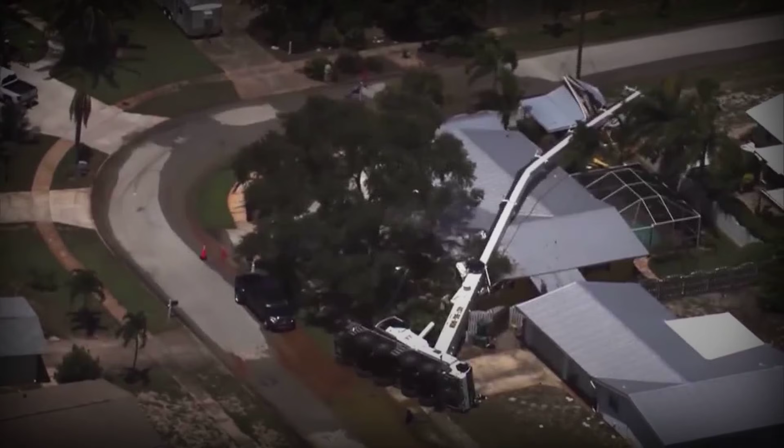August 13th, 2025. The Crane family spent decades in their Merritt Island home until a crane, meant to install an ordinary utility pole, collapsed without warning and crushed everything they owned.

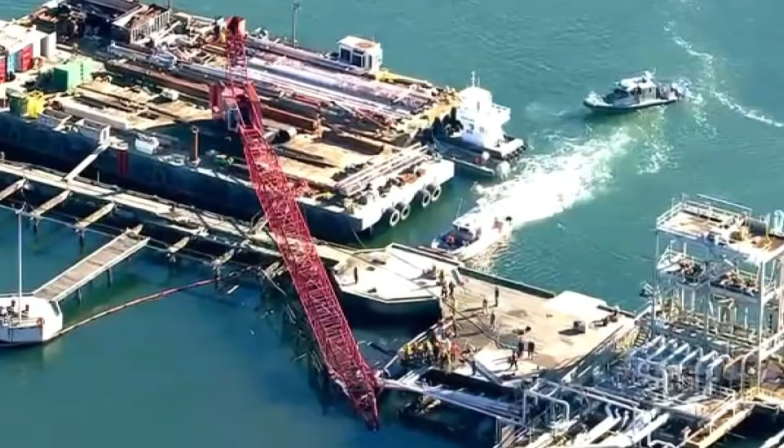The headline, "Crane versus Crane: When Your Last Name Becomes Your Nightmare," shocked the nation. Yet beneath the viral irony lies a pattern of reckless decisions, ignored warnings, and a deadly year for crane disasters across the United States. How could a single oversight destroy a family and expose an industry in crisis?

Jim Crane stood at the edge of his driveway, arms crossed, watching a crew from Big Iron International maneuver the Liebherr crane into position. The morning was already humid, the kind of Florida heat that makes everything feel heavier. He had lived on Mackerel Drive for over 40 years, long enough to know the ground here could be unpredictable, especially after summer rains. As the workers prepared to deploy the crane's massive outriggers, Jim's concern grew.

He stepped forward, voice steady but urgent. "I think this is a very bad idea," he told the operator, glancing at the spot where the outrigger would press down, just feet from his front walk. Doorbell camera footage later time-stamped the moment at just after 10:20 a.m. The crew barely looked up.

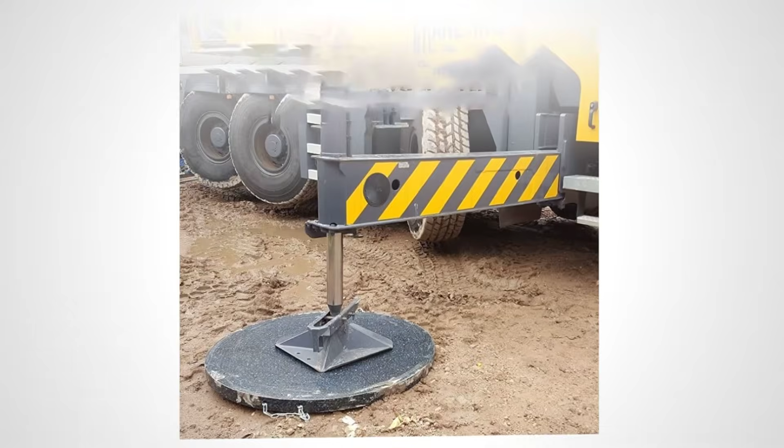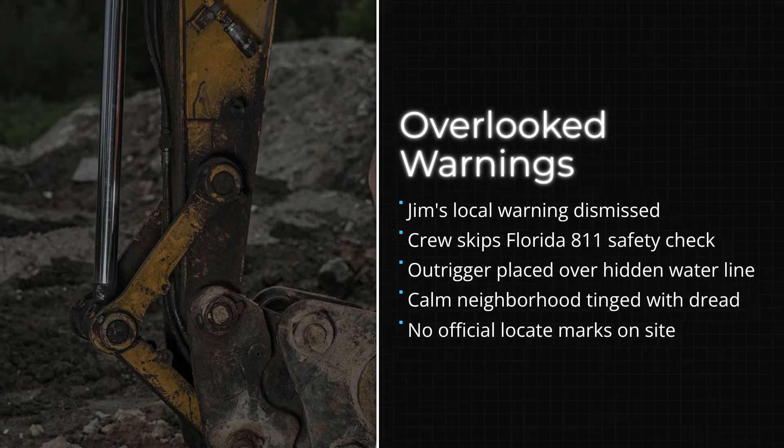One worker, in a high-visibility vest streaked with dust, shrugged off the warning. He assured Jim they'd done hundreds of jobs just like this, that the equipment and ground were more than up to the task. No one paused to check for utility markings or to ask if the ground had been surveyed. There was no sign of the orange spray paint that usually signals buried lines. No flags. No evidence that Florida's mandatory 811 call before you dig system had been followed.

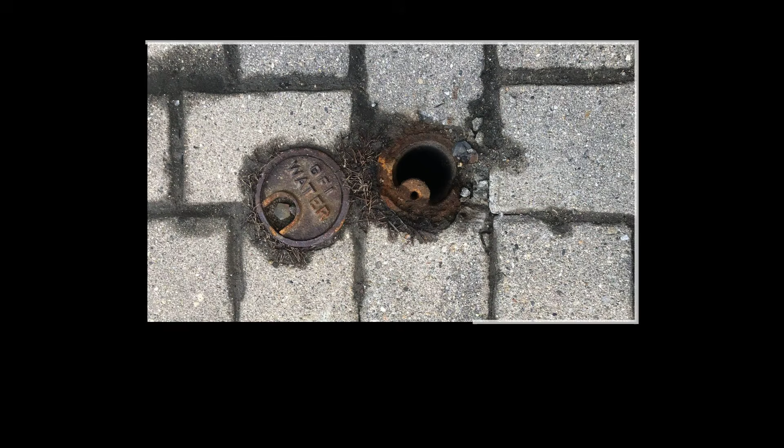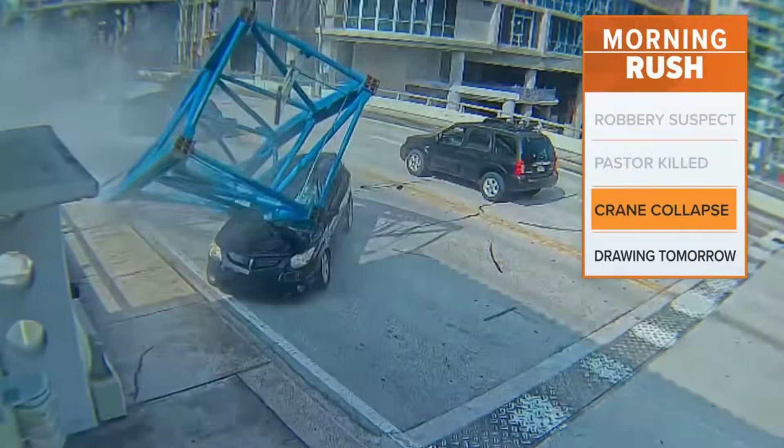The outrigger pad settled directly over a patch of grass that Jim knew sat above an old, unmarked water main, something he'd mentioned twice. As the crew set up, neighbors watched from behind their windows, some filming with their phones as the crane's boom began to rise. Jim lingered outside, uneasy. "I just kept thinking, this isn't right," he later told a local reporter. "But they wouldn't listen." The confidence of the crew stood in sharp contrast to the anxiety on Jim's face, captured in passing by a neighbor's camera as he paced the sidewalk.

In that moment, the difference between professional assurance and lived experience was measured in a few feet of ground and a single ignored warning. The tension built quietly, the outcome still hidden beneath the surface as the crane's engine rumbled and the day pressed on.

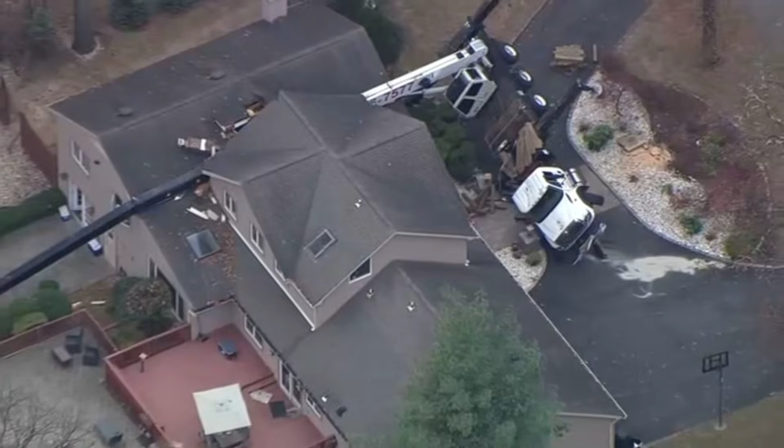A helicopter circled above Mackerel Drive as sirens echoed in the distance. The white and blue boom of the Liebherr crane pierced straight through the roof of the Crane family home, splitting the structure from the kitchen to the back porch. Debris fanned out across the yard. Furniture and beams tangled under the weight of tens of thousands of pounds of steel. From above, the devastation was unmistakable. A single machine had erased decades of family history in seconds.

Neighbors gathered on the sidewalk, some still clutching their phones, stunned by the violence of what they had just witnessed. One described hearing a thunderous crash that rattled windows up and down the block. Another, voice shaking, told a reporter, "It sounded like the world was ending."

Amanda Crane's car was missing from the driveway. She had left early that morning to take their rescue dog to the veterinarian. That small change in routine meant she was miles away when the collapse struck. Later, she would tell Fox 35, "She saved my life, and I saved her. These are just things, but I'm grateful we're alive."

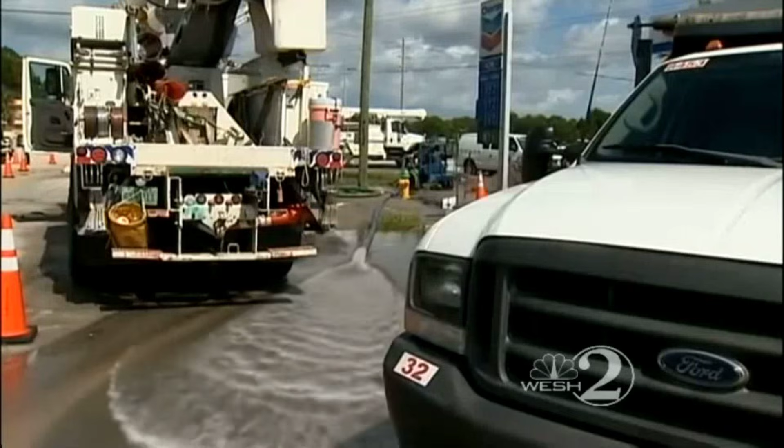Jim stood outside, untouched but shaken, watching as water from the broken main continued to flood the property. The sound of rushing water mixed with the beeping of emergency vehicles as first responders arrived. Firefighters and police moved quickly to secure the area, checking for gas leaks and searching the ruins to confirm no one was trapped inside. The living room, the kitchen, and the back bedrooms were all reduced to splintered wood and twisted metal.

In the hours that followed, news crews from Fox 35 Orlando and WESH set up along the curb, broadcasting live shots of the wreckage. The story spread quickly. Total property loss, no injuries, and the bitter irony of a family named Crane losing everything to a crane. For Jim and Amanda, survival was a matter of luck and timing. For their neighbors, the sight of the crushed home served as a reminder that disaster can arrive without warning, even in the most familiar place.

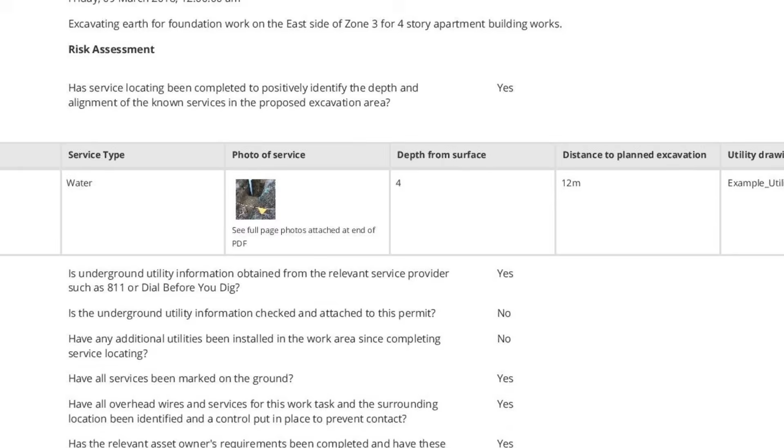Big Iron International's crew arrived on Mackerel Drive with a clear mandate: install a new utility pole for AT&T. The job should have started with paperwork. Florida law requires contractors to call 811 at least 2 business days before any ground disturbance. This step triggers utility companies to mark buried lines and pipes, a safeguard meant to prevent exactly the kind of disaster that would unfold. But no such notification was made.

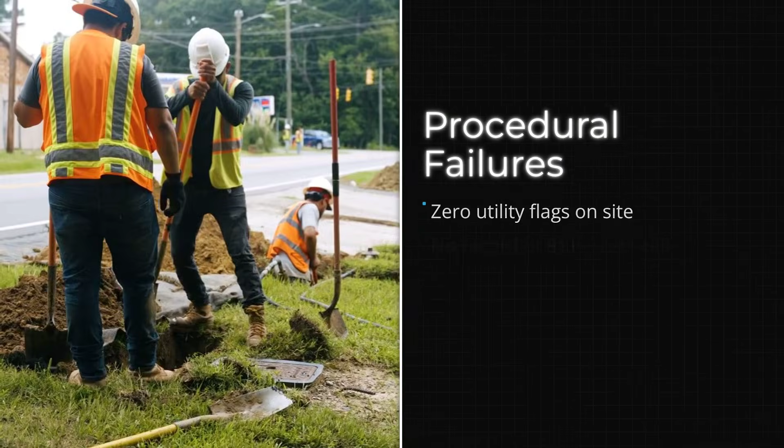There were no utility flags, no records of a completed 811 call, and no evidence of ground-penetrating radar having been used to scan for subsurface hazards. Florida's Underground Facility Damage Prevention and Safety Act leaves little room for interpretation.

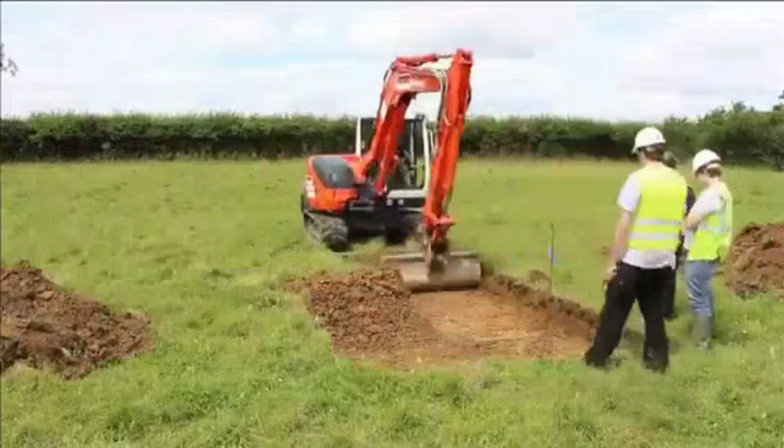The statute covers any operation that disturbs the ground, including the temporary placement of crane outriggers. A 2024 legislative update made it explicit. Failing to notify 811 and verify markings before deploying heavy equipment is not just unsafe. It's a direct violation, now carrying fines of up to $2,500 per incident and up to $10,000 for repeated or

willful breaches. The official Florida 811 Handbook for Excavators, revised in 2025, reminds contractors that outriggers, even if temporary, can exert ground pressure sufficient to breach utilities and are treated as excavation under current law.

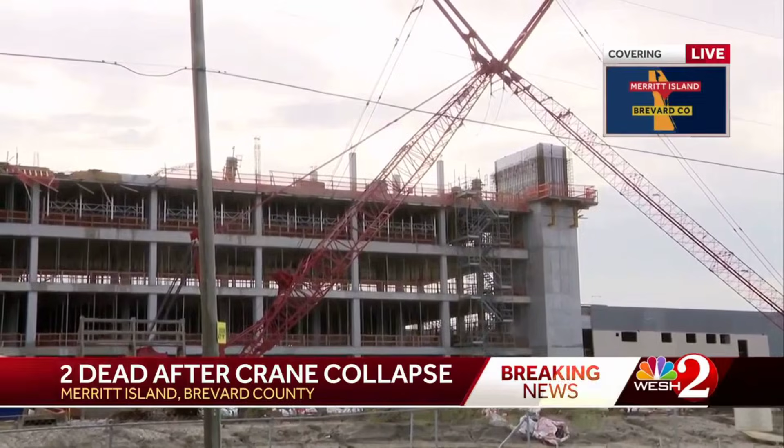Despite these requirements, the crew from Big Iron International acted on routine, not regulation. There was no written confirmation of utility clearance, no documentation of pre-job safety checks, and no permit on file for ground disturbance. The absence of these records would later draw sharp attention from investigators, but on the morning of August 13th, the crew pressed forward.

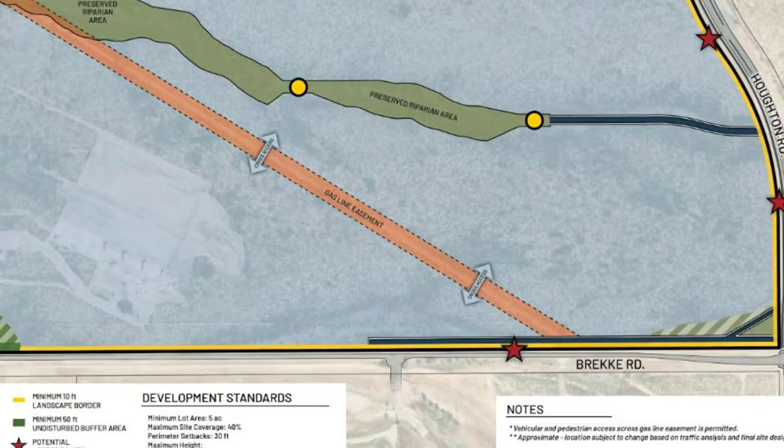AT&T, as the contracting entity, had delegated the work, but did not require a pre-lift safety audit or verification of utility marking as part of their subcontractor oversight. This gap in the contract chain allowed the crew to bypass essential safeguards without challenge or delay. The decision to skip procedural steps set off a chain reaction that could not be reversed.

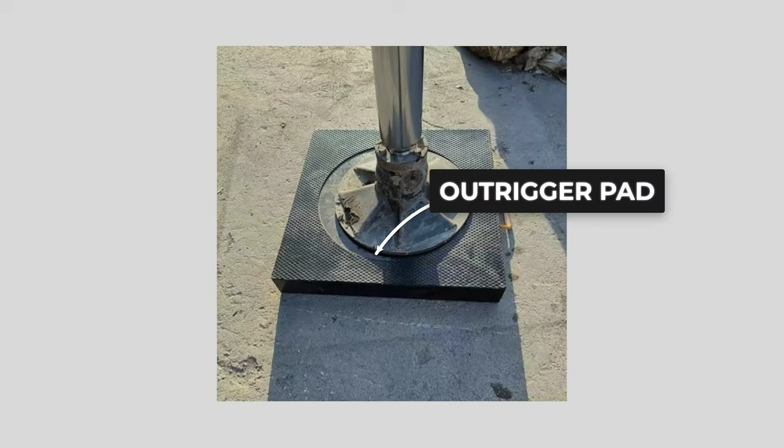With no utility markings and no ground survey, the outrigger was sited directly above an unmarked water main. The crew's reliance on experience, rather than compliance, left them blind to the danger beneath their equipment. The paperwork that should have protected the homeowners and the crew itself never existed. The legal and procedural safeguards were not just overlooked, they were absent from the start, leaving the site exposed to the hidden risks below.

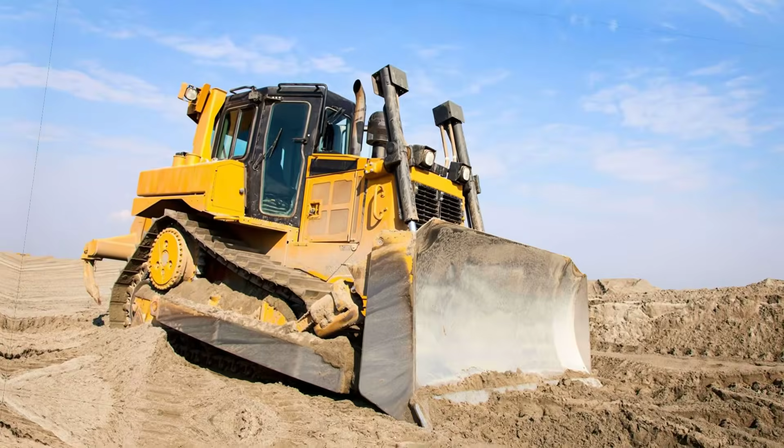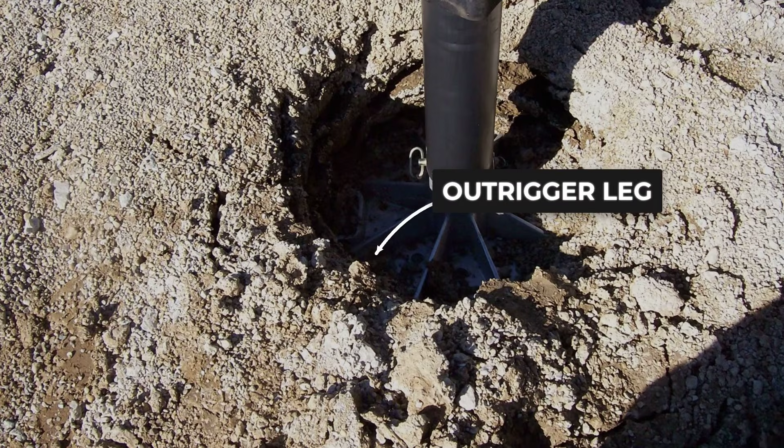A crane's stability depends on the invisible partnership between steel and soil. Outriggers, those heavy legs that spread from the crane's base, are designed to transfer tens of thousands of pounds onto the ground below. On a typical lift, each outrigger pad on a large Liebherr all-terrain crane can press down with as much as 80 tons, more than the weight of a diesel locomotive, focused onto a patch of earth not much bigger than a kitchen table.

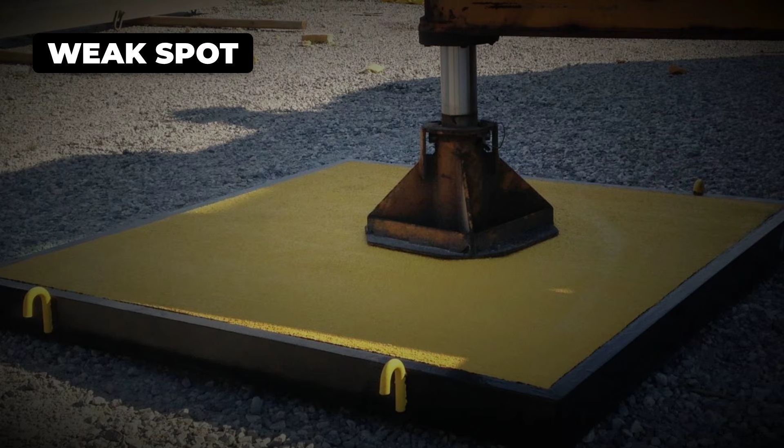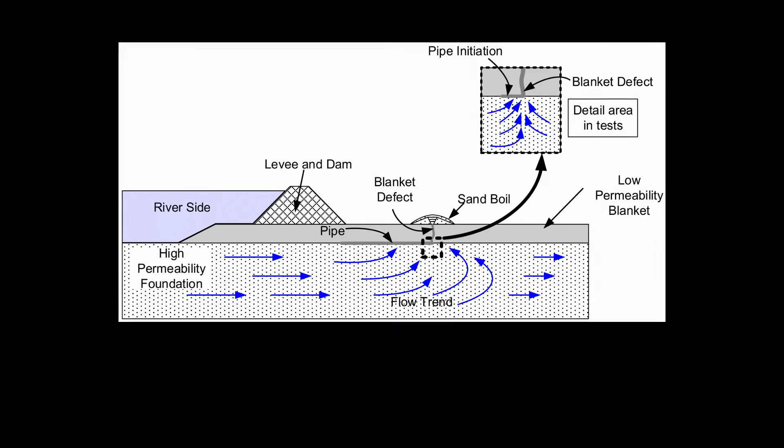That force only holds if the soil beneath remains solid and dry. When a pressurized water main ruptures, the physics change in an instant. Water surges out, carrying fine sand and soil particles away at high speed. This process, called internal erosion or soil piping, undermines the ground's structure from below, hollowing out support that once seemed firm. Florida's sandy soils, already loose and saturated from summer rains, are especially vulnerable.

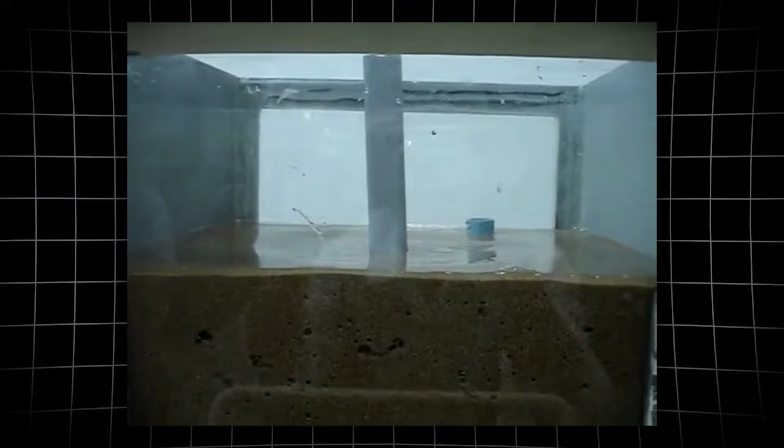A 6-inch water main at city pressure, often 80 pounds per square inch or more, can release over 1,000 gallons a minute, enough to wash out the supporting earth in less than 5 minutes. Civil engineering studies confirm that soil-bearing strength can drop by 90% in moments, turning what was once solid ground into something that acts more like quicksand. As the water jets upward, the outrigger pad loses its footing.

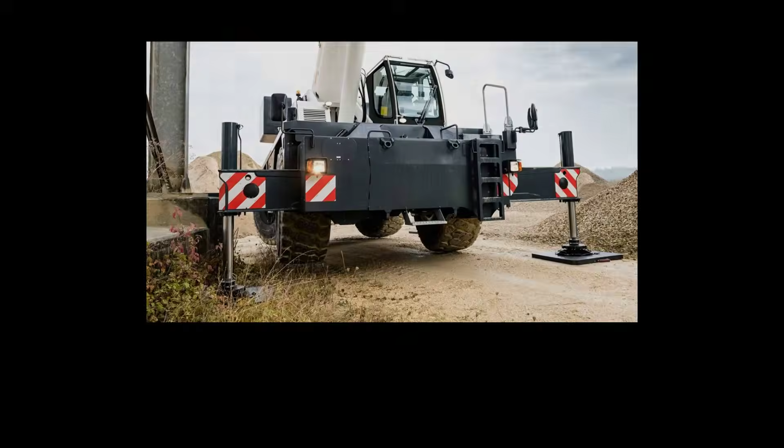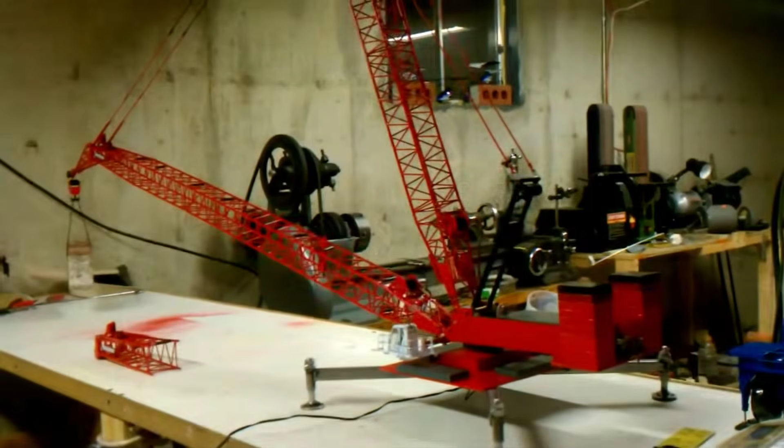The load that was safely distributed across 4 points suddenly shifts, concentrating weight on the remaining supports. But with one corner gone soft, the crane's center of gravity moves outside its safe zone. The entire machine becomes a teeter-totter with nothing to balance against. The physics are unforgiving. Even a slight tilt is enough to send the boom arcing downward. In documented cases, collapse can follow less than 90 seconds after the first signs of washout.

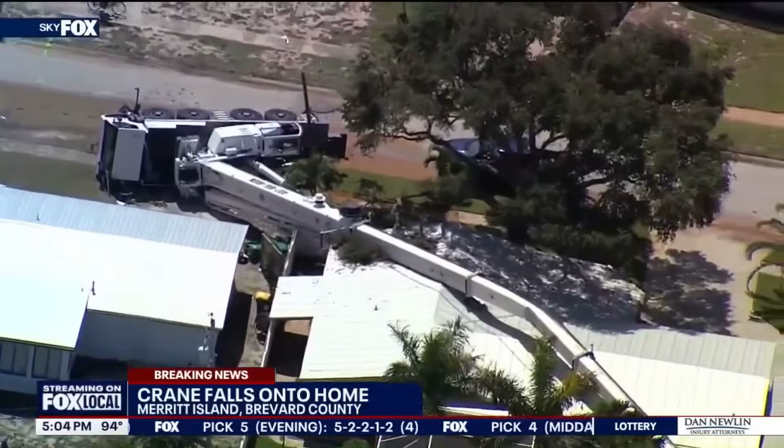OSHA diagrams and news footage from Merritt Island show the sequence clearly. The soil vanishes beneath the outrigger. The crane's base tilts, and the boom pivots inexorably toward the house. There is no time to react or redistribute the load. The collapse is not a slow-motion failure, but a sudden, catastrophic loss of support.

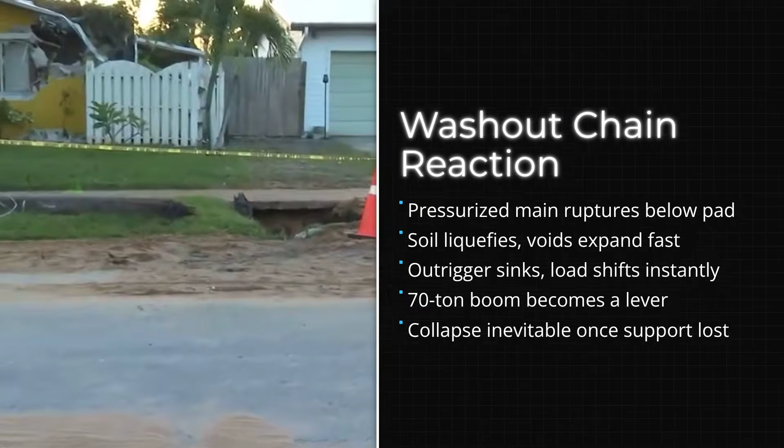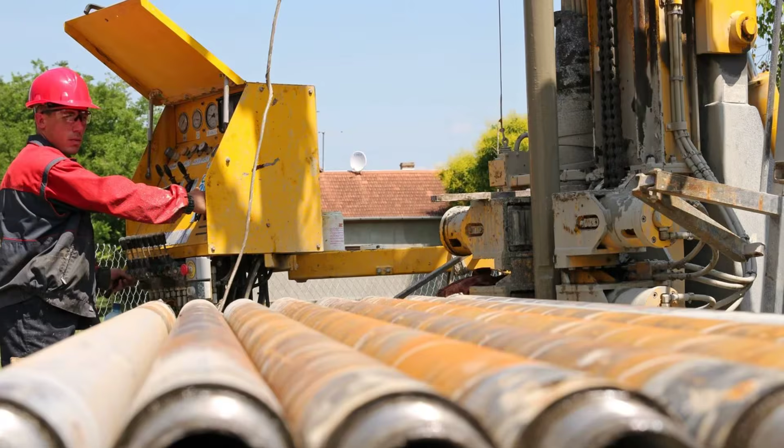A chain reaction set off by water, gravity, and the absence of a simple precaution. In the end, the forces at work are invisible until the moment they become undeniable, leaving behind a trail of destruction that could have been prevented by understanding what lay below the surface.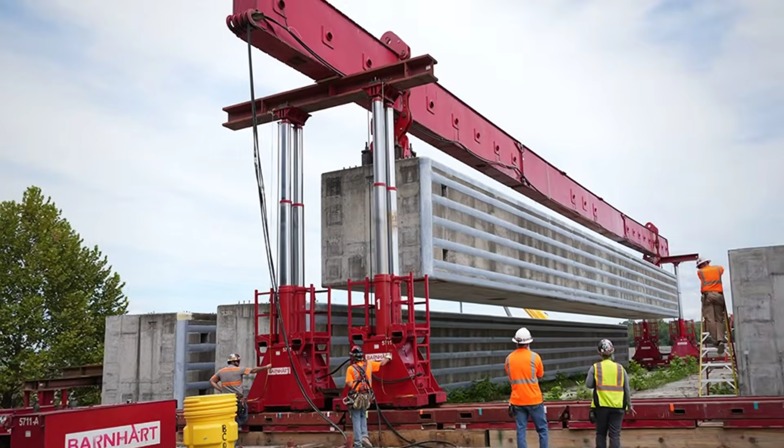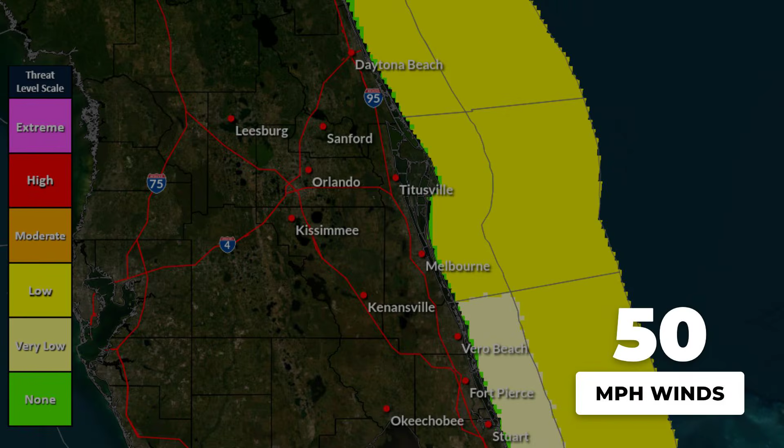On June 3, 2025, the construction site at Cape Canaveral Hospital was bustling with activity as crews worked to expand the facility. The project, valued at $410 million and led by Gilbane Building Company, had brought in a crawler crane operated by Sentry Crane and Rigging LLC to handle heavy concrete pours. That morning, the National Weather Service had issued a warning. Winds along the Brevard County coast were expected to reach 50 miles per hour. Despite the advisory, work pressed on.

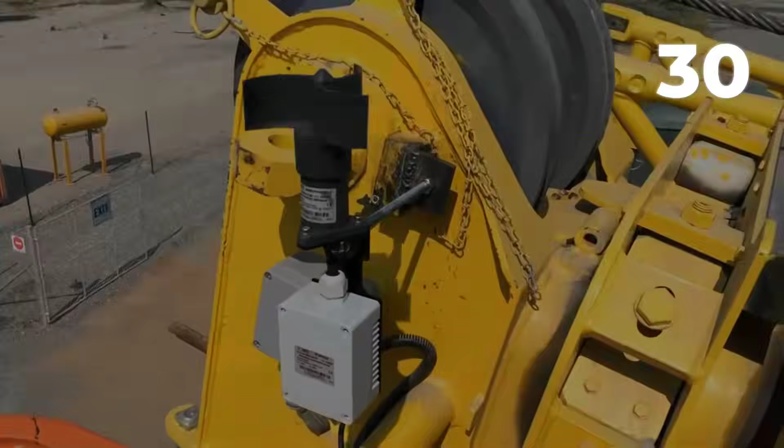By midday, sustained winds were clocked at nearly 30 miles per hour, with gusts well above the safe limit for crane operation. Witnesses later described the crane's boom swaying as workers hurried to complete the lift. Then, without warning, the boom collapsed, crashing down onto the site. 2 workers lost their lives in the chaos that followed. Their names were withheld from news reports at the request of their families, but memorials and union statements spoke to the loss felt across the community.

The collapse was not simply a matter of bad luck or unpredictable weather. Local news investigations revealed that Brevard County, responsible for overseeing construction safety, had only 2 certified crane inspectors on staff in June 2025.

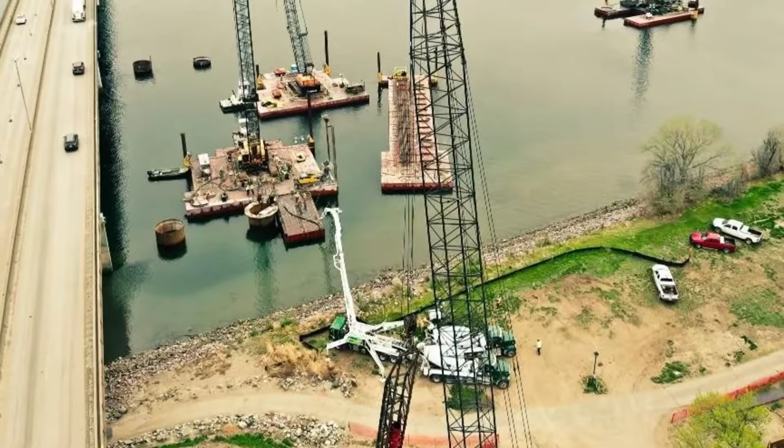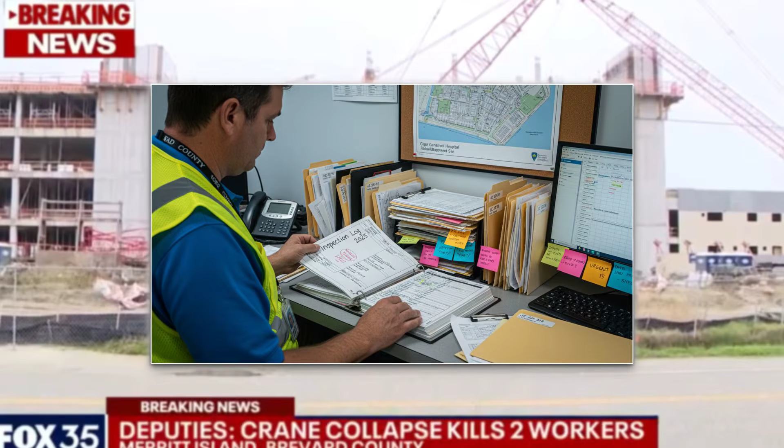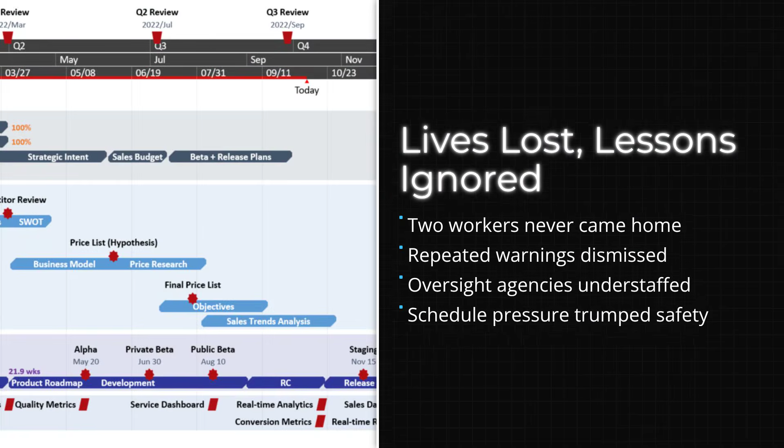With hundreds of active sites spread across the county, each inspector was stretched thin, sometimes responsible for more than 60 projects at once. County records confirmed that neither inspector had visited the Cape Canaveral site in the 2 days before the tragedy. In the aftermath, FOX 35 and other outlets questioned whether the drive to keep projects on schedule had eclipsed basic safety. OSHA's preliminary findings pointed to a failure to suspend crane operations despite official wind advisories.

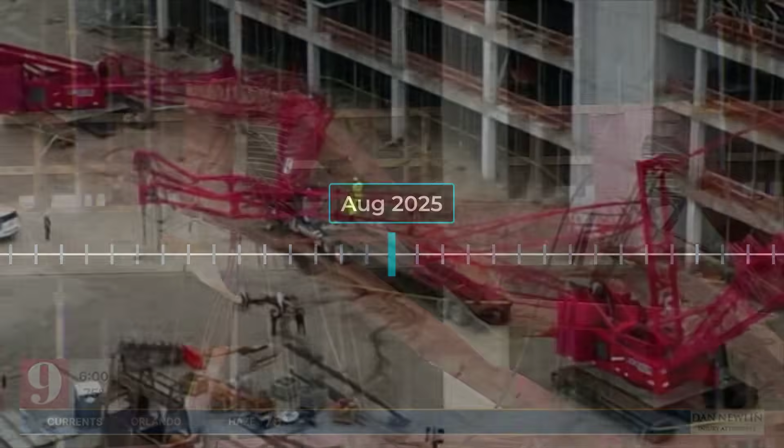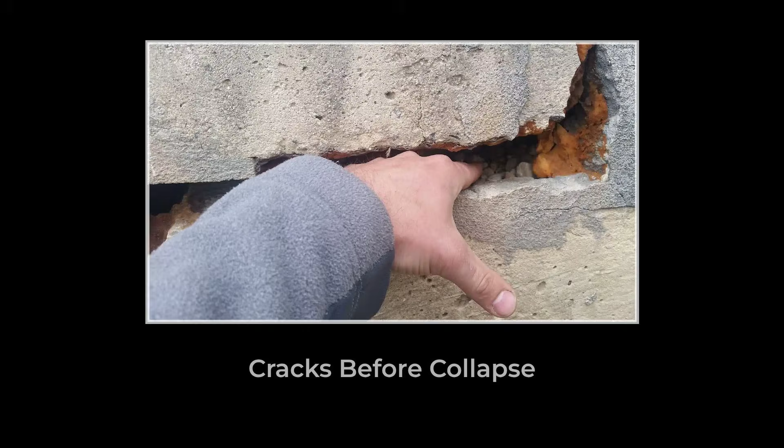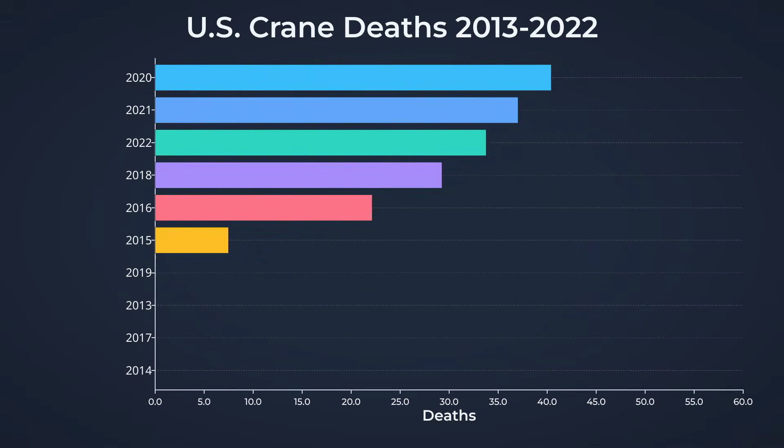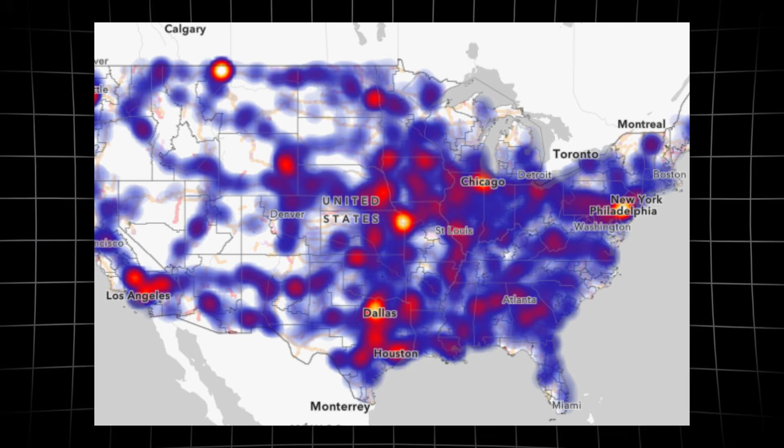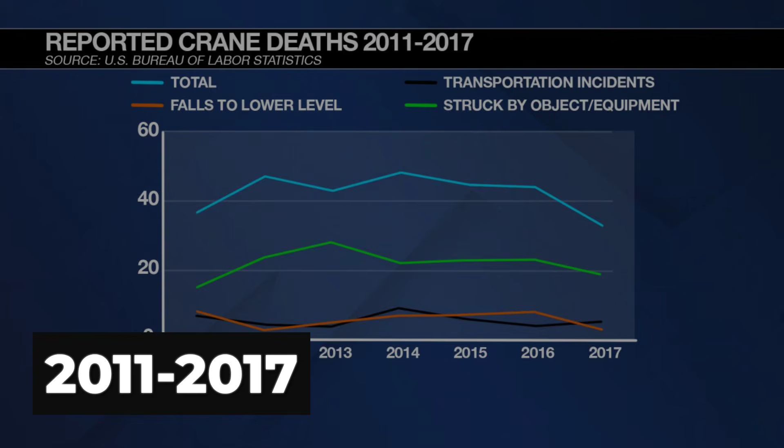From 2011 through 2017, there were 297 fatalities nationwide, a figure that does not include the mounting toll of the past 2 years. Industry analysis of 249 significant crane accidents links these events to 838 separate OSHA violations, resulting in 133 injuries and 133 deaths. Florida stands out as a national hotspot. Between 2011 and 2017, the state recorded 27 crane-related deaths, second only to Texas, which reported 42.

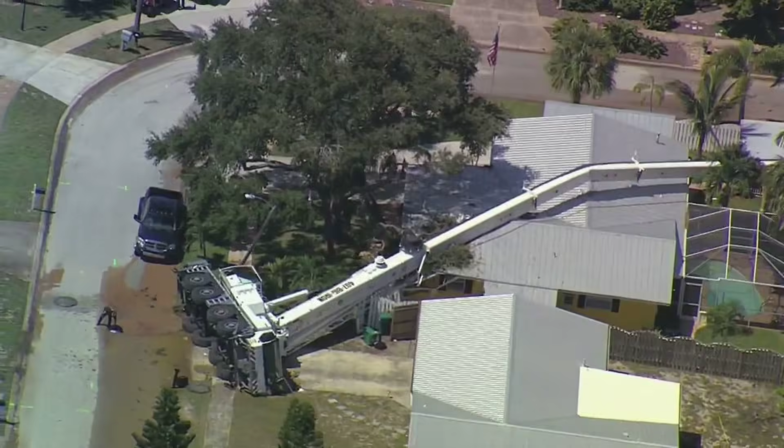In 2025 alone, Florida has been at the center of 2 of the year's most widely reported collapses: the Merritt Island residential disaster and the Cape Canaveral Hospital tragedy. The pattern is not unique to one region. In April 2024, a crane fell onto vehicles in Tampa, killing 1 and injuring 3. That same spring, 2 photojournalists died in Mexico City when an uninspected crane collapsed during a music festival.

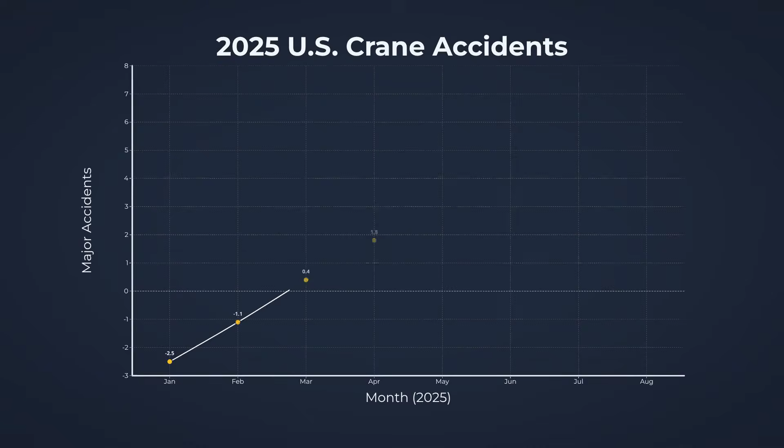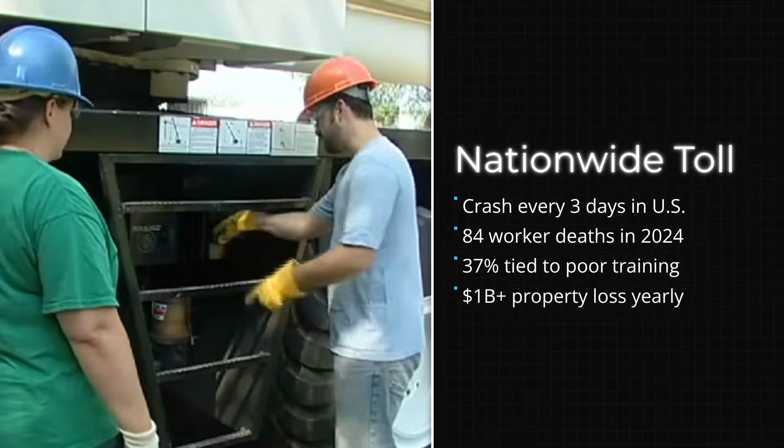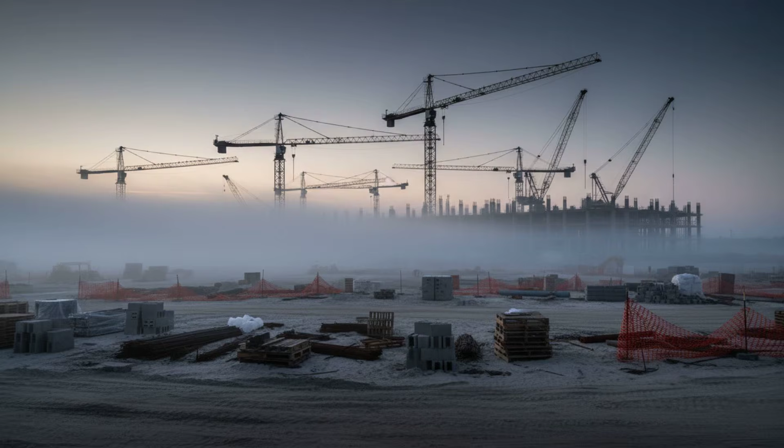The construction industry has seen nearly 2 major crane accidents per month in 2025, a pace that safety experts call unprecedented. OSHA's preliminary findings and emergency hearings have drawn attention to a common thread: failures in site assessment, inadequate crew training, and overlooked regulatory steps. Each number in these reports represents a workplace changed forever, a family left to pick up the pieces. As the year draws on, the statistics are no longer abstract. They are evidence of a crisis that demands urgent attention, not just from regulators and contractors, but from every community where cranes rise above the skyline.

A home can be rebuilt, but peace of mind is harder to restore. For Jim and Amanda Crane, months have passed in temporary housing, while insurance companies debate who is responsible for more than $400,000 in damages. Their story is a warning, but it is also a guide for others, especially seniors, about how to protect themselves before the first piece of heavy equipment arrives on their street. The American Society of Civil Engineers now recommends that every residential crane operation require a ground-penetrating radar survey. This is not just for large construction sites. It includes utility work and even small residential lifts.

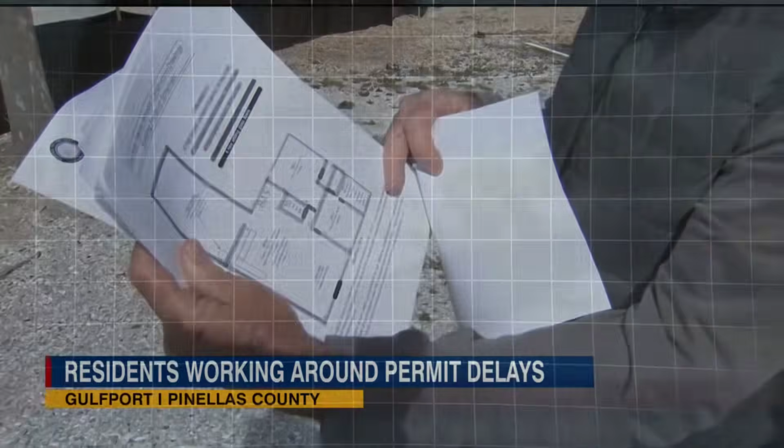If you see a crane or heavy equipment near your home, ask to see written proof of a recent 811 call and a GPR scan. These are your rights under Florida law. The Florida 811 system can be reached by dialing 811 or visiting florida811.com. If a contractor cannot provide documentation, you have the right to contact local permitting offices or code enforcement. For Brevard County, the main number is 321-633-2072. Document everything. Take photos of equipment, workers, and any visible markings or lack thereof. Ask for the contractor's insurance information and keep a record of every conversation.

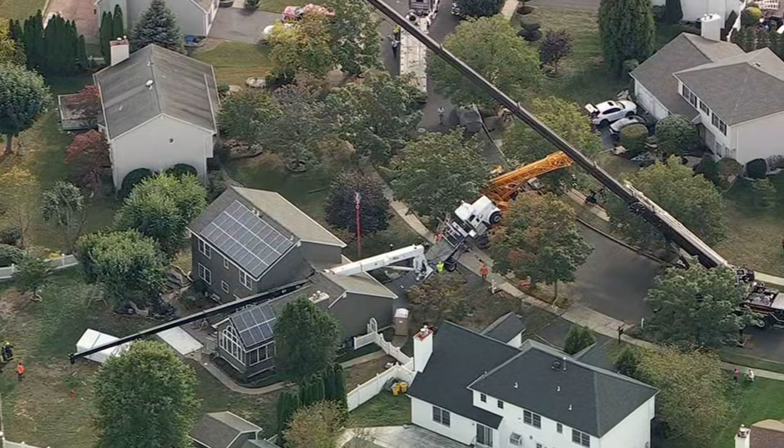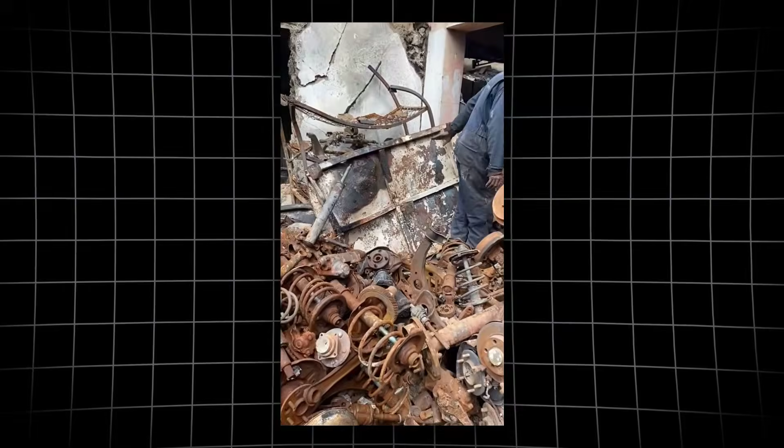If you notice unsafe practices, call OSHA at 1-800-32-16742. These steps are not just bureaucratic. They can mean the difference between a close call and a catastrophe. For those already affected, like the Cranes, persistence is essential. Insurance disputes over contractor negligence are common, especially when multiple companies are involved. Keep copies of news coverage, incident reports, and all correspondence. If compensation is delayed, contact the Florida Department of Financial Services Consumer Helpline at

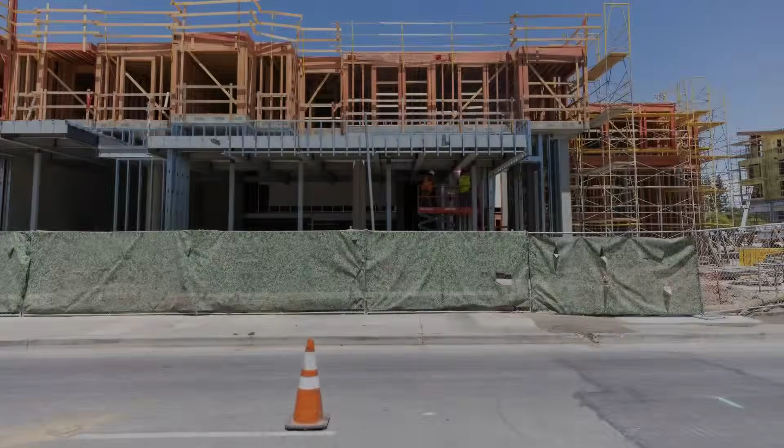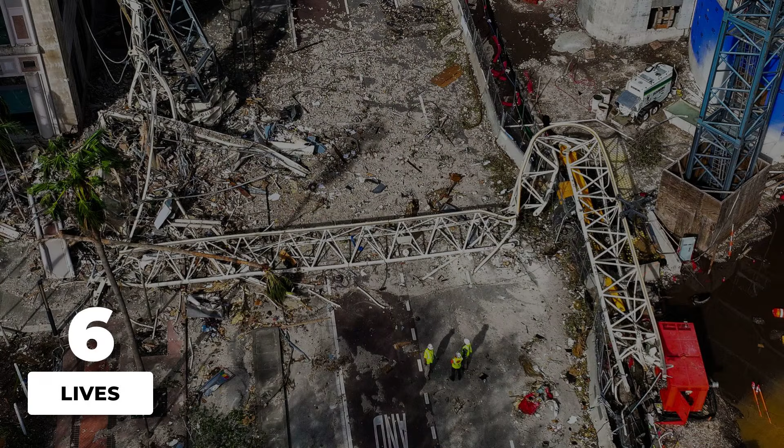1-877-693-5236. As OSHA prepares to release final reports and penalties, expected to exceed $500,000 per incident, pressure is mounting for real accountability. But lasting change will depend on everyday vigilance. The checklist is simple. Demand proof of safety steps, document everything, and don't hesitate to speak up. The Cranes' ordeal is a reminder that prevention starts at the curb, long before disaster strikes. In 2025, 11 major crane collapses across the United States claimed 6 lives and destroyed homes like that of Jim and Amanda Crane in Merritt Island.

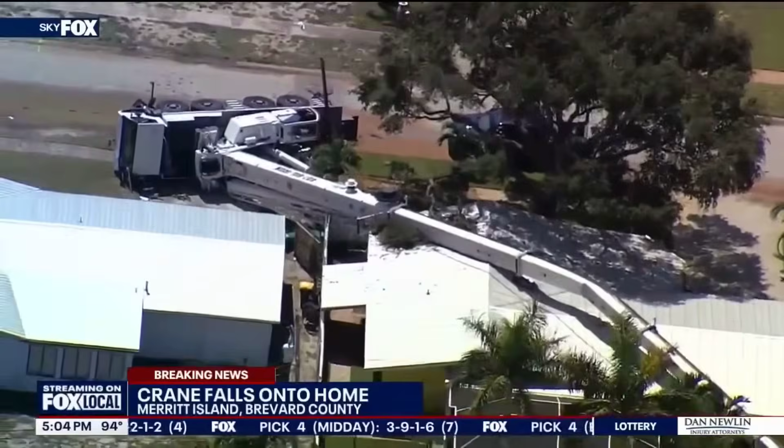News footage and official records show that, in this case, warnings were ignored, required utility scans were skipped, and basic safety rules went unenforced. The same year, 2 workers died in a nearby Cape Canaveral crane accident, highlighting critical gaps in inspection and oversight. Despite clear evidence of preventable errors, final OSHA reports and insurance settlements remain unresolved, leaving families displaced and communities demanding answers. National data confirms that Florida continues to face one of the highest rates of crane-related deaths in the country.

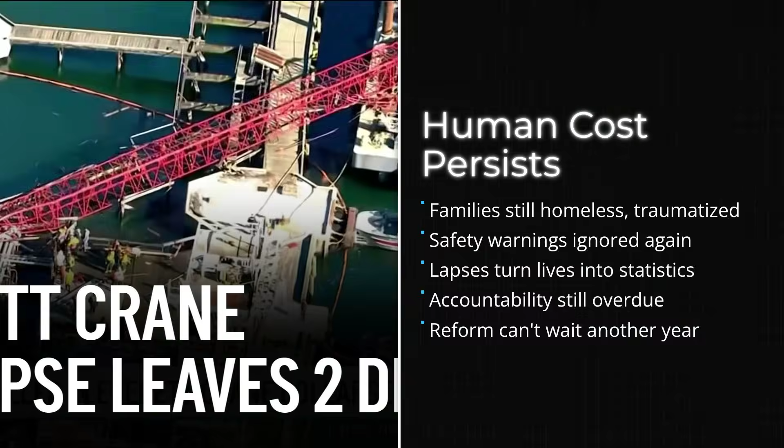As 2025 draws to a close, the facts are clear. Regulatory lapses, cost pressures, and ignored warnings have led to tragedy. The story of the Crane family stands as documented proof that even the most improbable disasters can happen, unless safety protocols and oversight are enforced before another name is added to the statistics.